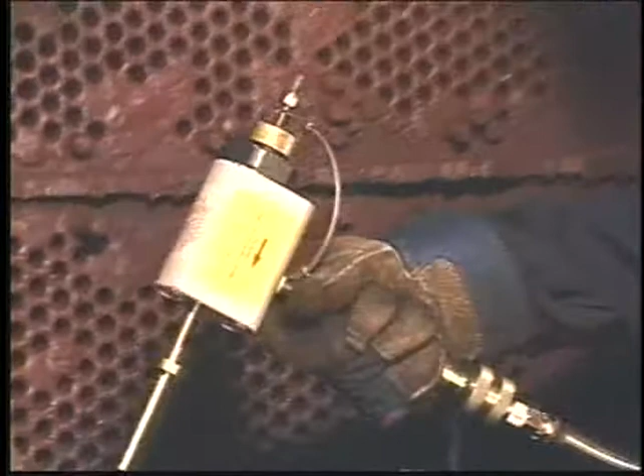Expansion Seal Technologies P2 Plug Installation Training. This training video shows how to select proper plug size, prepare heat exchanger tubes, and install Expansion Seal Technologies high-pressure P2 plug. See the CPI PermaPlug training video to install CPI PermaPlugs.

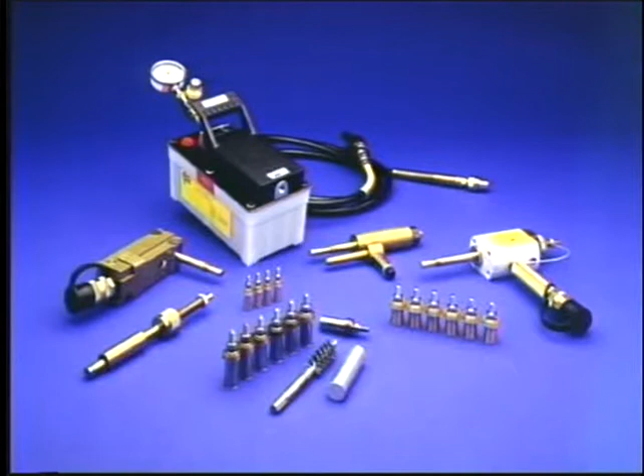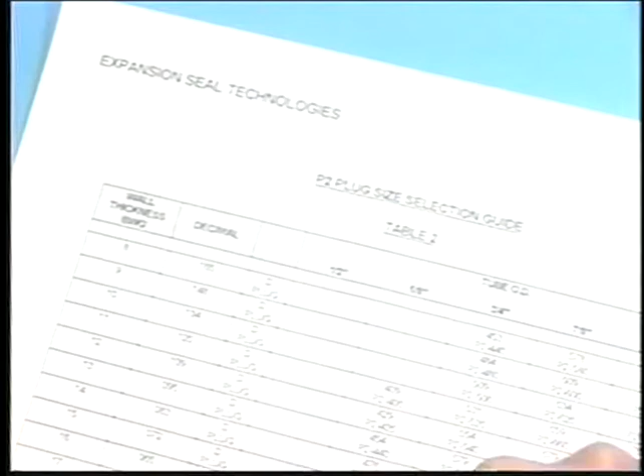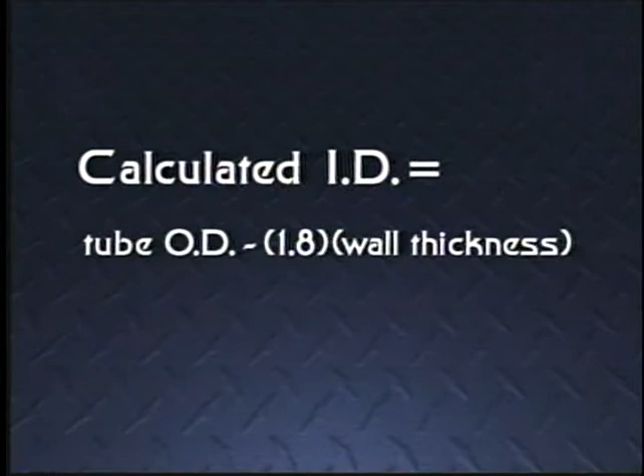If plugs are purchased before it is possible to measure the actual tube ID, the proper plug size can either be determined from information in the heat exchanger data sheet or from prior experience with that heat exchanger. From the data sheet, take the tube OD and wall thickness and determine P2 sizes using either EST's sizing guide or the tube ID calculated using the following formula. Calculated ID equals tube OD minus 1.8 times wall thickness. Both of these methods will provide a good starting point for the outlet tube ends.

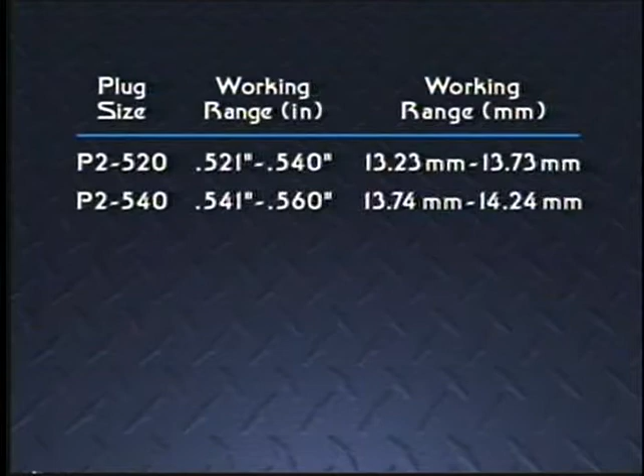Each P2 plug size is capable of expanding 20 thousandths of an inch, 0.5 millimeters. If the calculated tube ID is within 5 thousandths of an inch, or 0.13 millimeters of the top of the plug size range, order the next larger plug size to allow for required material removal during brushing. For example, if the calculated ID is 0.537 inches, select a 540 P2 plug size.

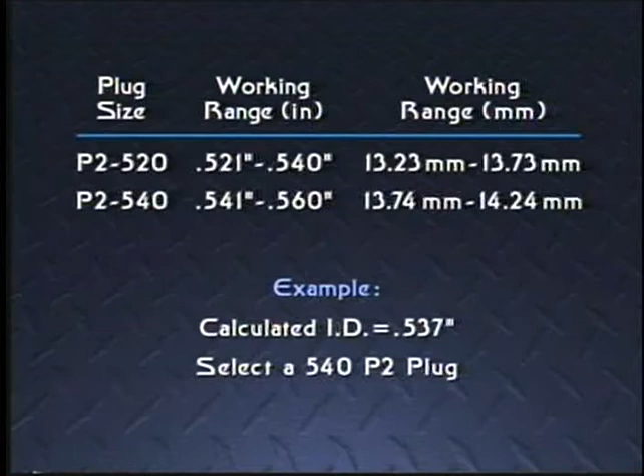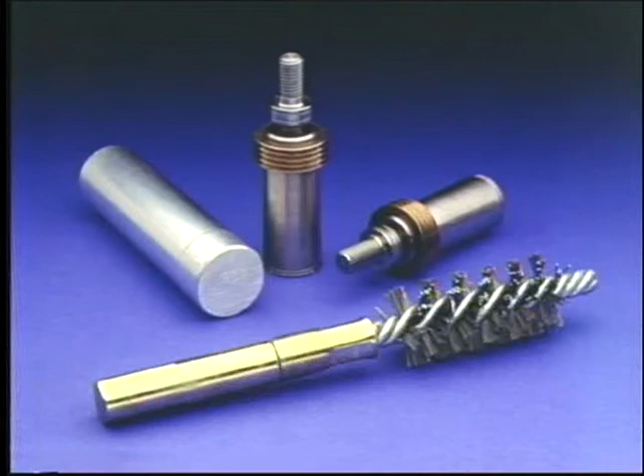The inlet tube diameter may be eroded as much as 3/32 of an inch or 2.38 millimeters due to wear caused by inlet fluid turbulence. It is always wise to have on hand plugs up to a few sizes larger than calculated, especially for an older heat exchanger. Obviously, if the heat exchanger is already open, it is best to measure the actual tube ID at the inlet and outlet.

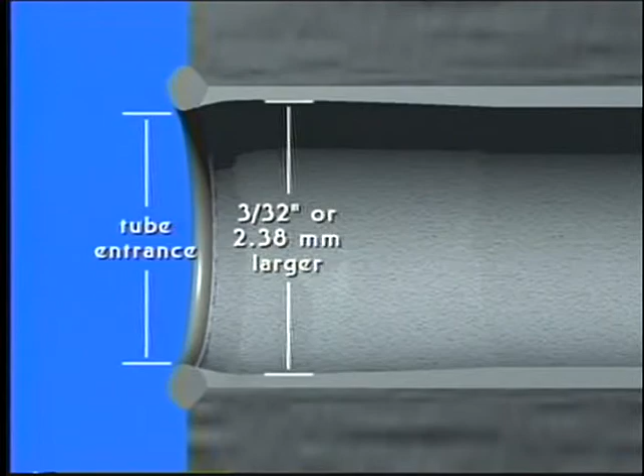Be careful to remove any weld projection with a tapered reamer before measuring. If this is not done, you will find that you have ordered undersized plugs. When selecting P2 plugs, the plug material must match the tube material. Always prepare a tube before plug installation.

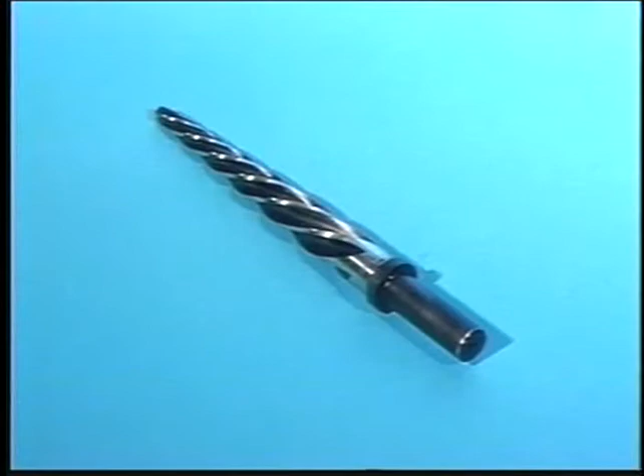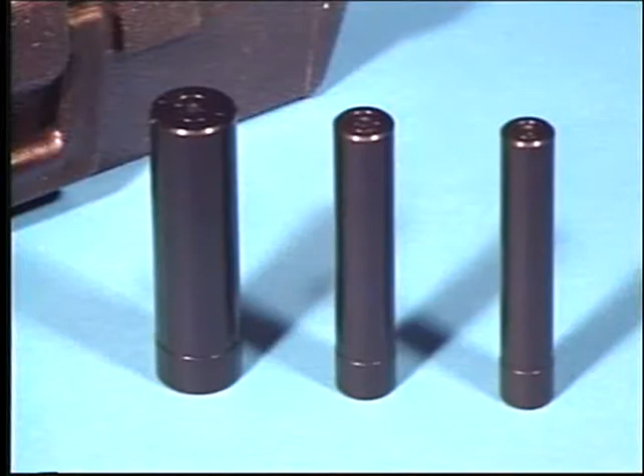The tube preparation tools are a tapered reamer to remove weld projection, a go, no-go gauge, and the proper size tube cleaning brush. A go, no-go gauge and tube cleaning brush corresponding to the plug size is supplied with each box of P2 plugs. Go, no-go gauges are also available in the form of a gauge kit. Gauge kits, additional brushes, and tapered reamers are ordered separately.

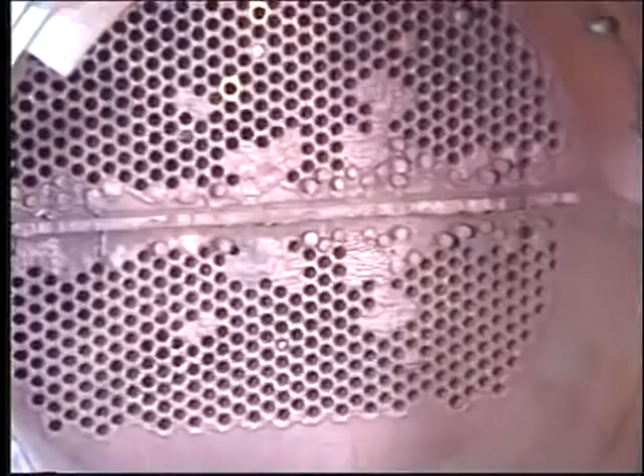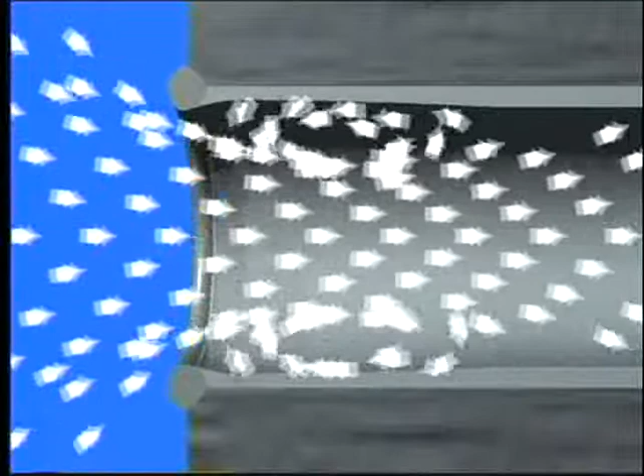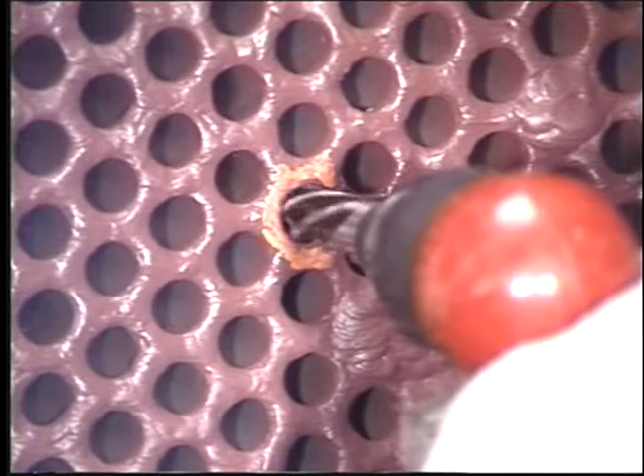Feed water heaters have rolled and welded tube-to-tube sheet joints. Fluid turbulence at the tube inlet erodes the tube wall more than the harder weld material. Over time, tube ID can be 3/32 inches or 2.38 millimeters larger than the weld entrance. The resulting weld projection must be removed using the tapered reamer because a plug that only fits past the weld projection will be too small to seal the tube, and the weld projection destroys the brush.

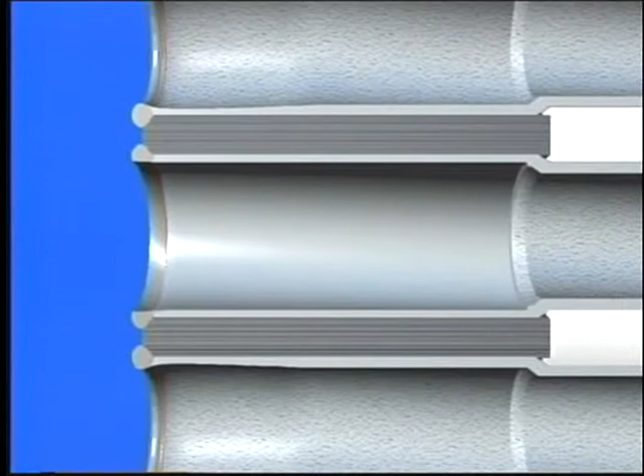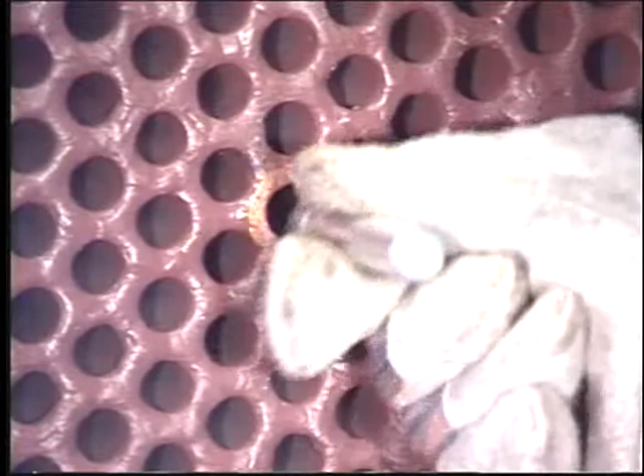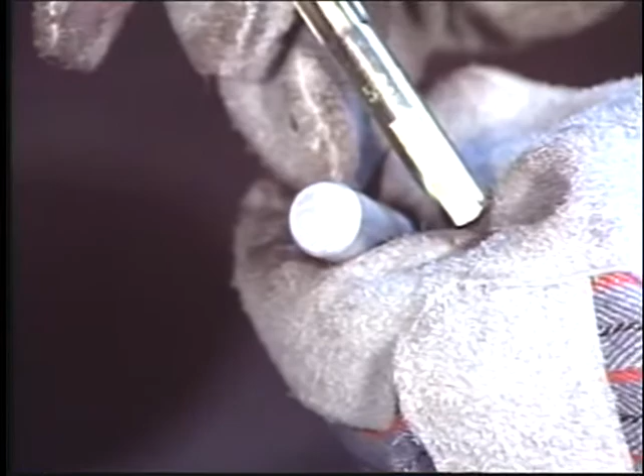When reaming, remove only enough weld material to clear the end of the tube. Do not over-ream. After tapered reaming, use the go, no-go gauge to confirm the correct brush size. If the small end fits into the hole but the large end does not, use the brush stamped with the same size. Do not assume each tube hole will be the same size. Gauge every tube end. The correct brush machines the tube to the brush OD. The use of Lubatube, a brush lubricant, greatly enhances the performance of the brushes in harder tube material.

Never use a smaller or larger brush than indicated by the gauge. A smaller brush will not remove tube defects. An oversized brush may jam and break. Reversing the drill to remove a brush will loosen the bristles. An oversized brush will create deep grooves and leaks.

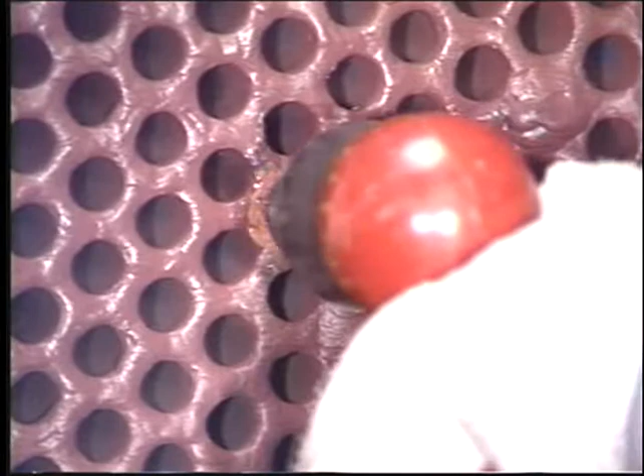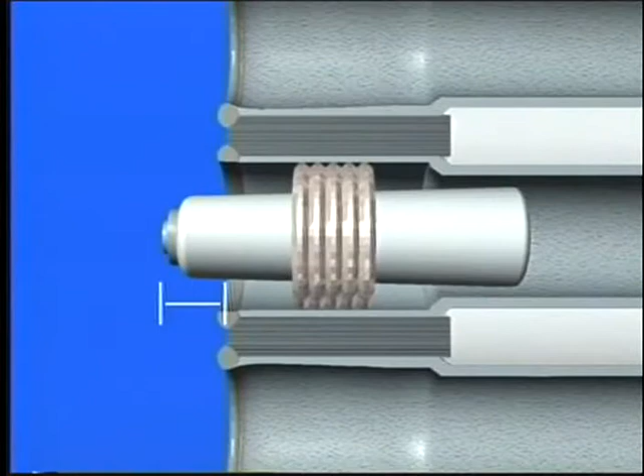Next, establish the correct installation depth. First, the plug must be installed in the rolled section of the tube sheet. Second, install the plug deep enough, 1 3/4 inches or 45 millimeters, to hide and protect the pin, but only if the tube sheet is at least 2 inches or 50.8 millimeters thick. If the tube sheet is less than 2 inches thick, the plug will have to be installed at a shallower depth and the pin may project beyond the tube sheet face. Be careful never to strike the exposed pin.

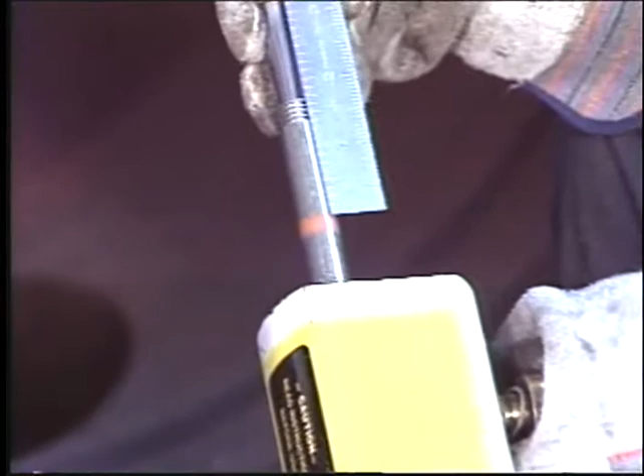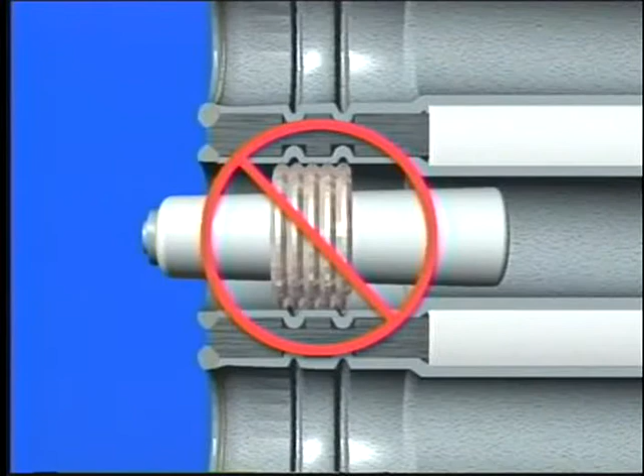For convenience, a reference mark may be made on plug positioner as shown. Marks should be removed at the completion of the job to prevent confusion the next time they are used. Caution: never install a P2 beyond the tube sheet, in the unrolled portion of the tube within the tube sheet, or over the grooves in a grooved tube sheet. Leaks will occur after thermal cycles.

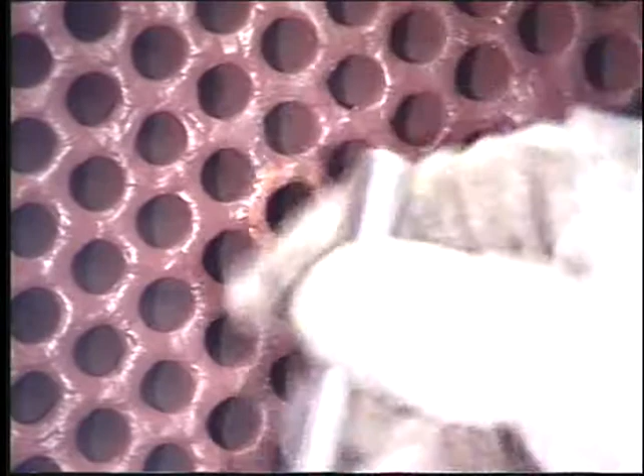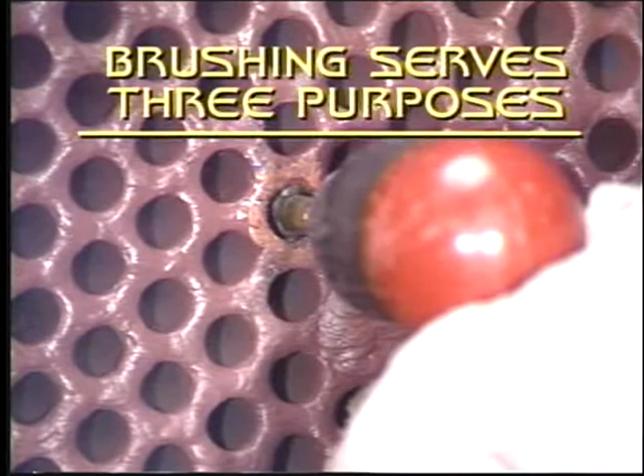Using the go, no-go gauge, determine the brush size, then brush the tube end for 30 seconds using a slow, steady back and forth motion evenly along the length from the opening to the installation depth. Brushing serves three purposes. The brush sizes the hole and makes it round. It removes leak-causing surface defects. Brushing improves the grip between the plug and the tube. Always inspect to see that brushing has accomplished these objectives.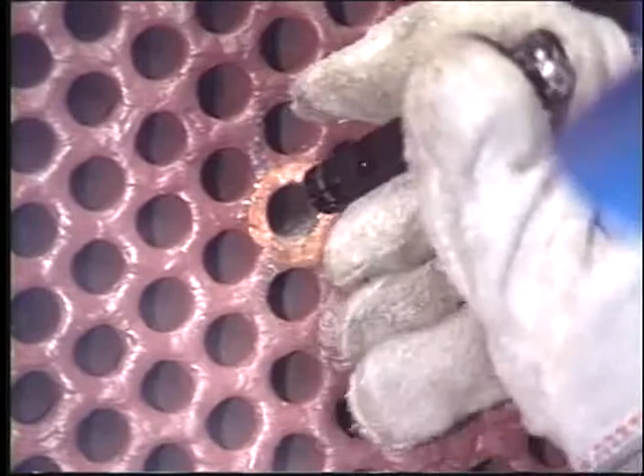Next, after blowing away the particles left from brushing, visually inspect the hole to see if it is defect-free. If there are still visible defects, repeat the brushing with the next larger size brush. Severe defects may require brushing with successively larger brushes to remove them. When moving up to a larger brush, never force the brush into the tube end. Allow the brush to do the work.

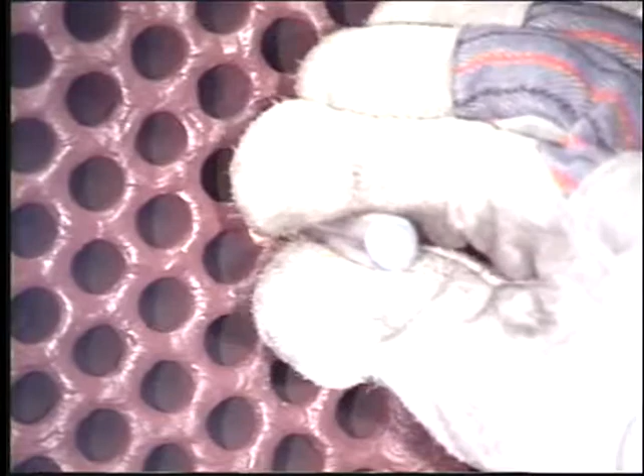Second, recheck the size of the brushed tube with the gauge. If the small end fits to the installation depth but the large end does not, install a P2 plug of the same size as the gauge. The tube preparation is complete.

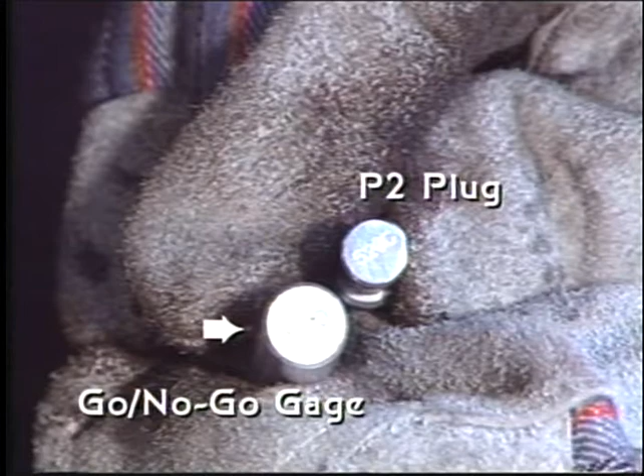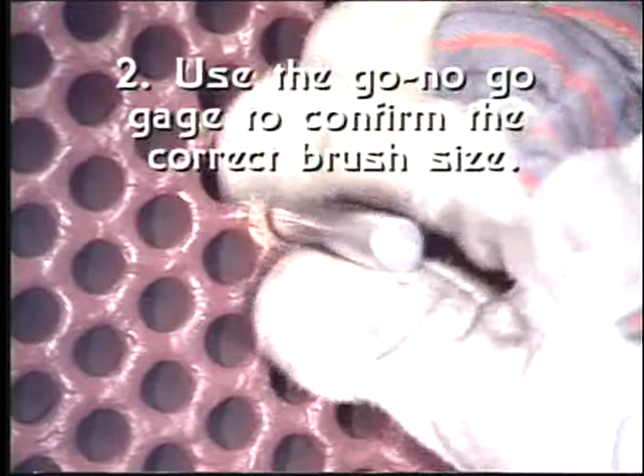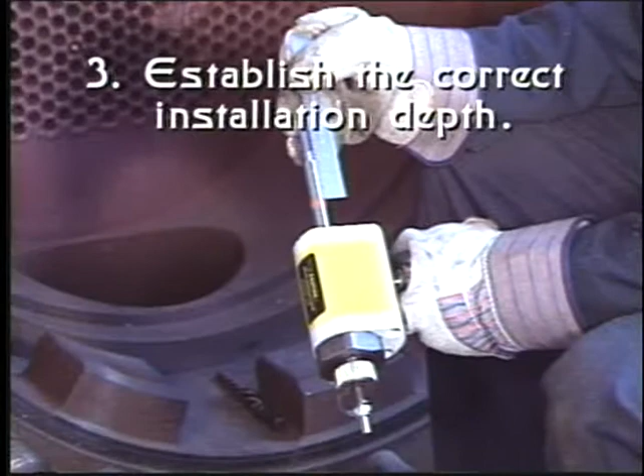The steps taken were: Number 1. Remove weld droop with tapered reamer. Number 2. Use the go, no-go gauge to confirm the correct brush size. Number 3. Establish the correct installation depth, preferably at least 1 3/4 inches or 45 millimeters unless the tube sheet is thinner. Number 4. Brush to the installed depth using even back and forth motion for 30 seconds.

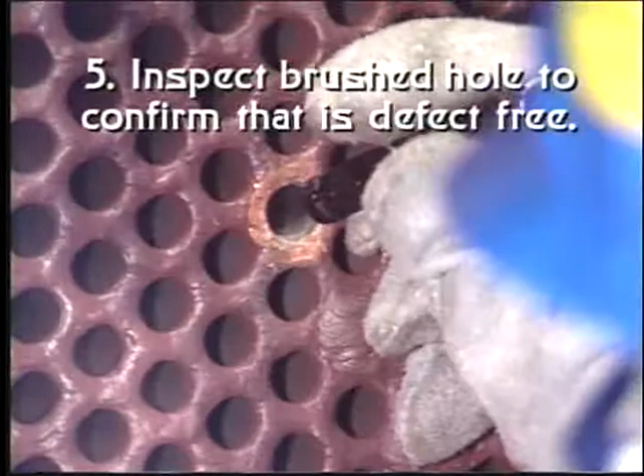Number 5. Inspect brushed hole to confirm that it is defect-free. Number 6. Re-gauge the brushed tube to confirm the correct plug size. We are now ready to install the plug.

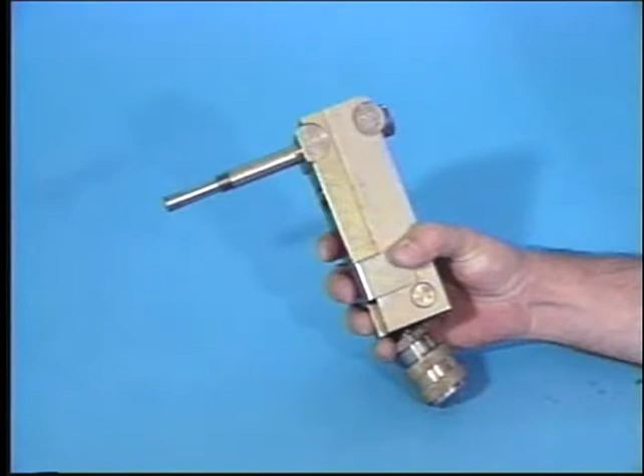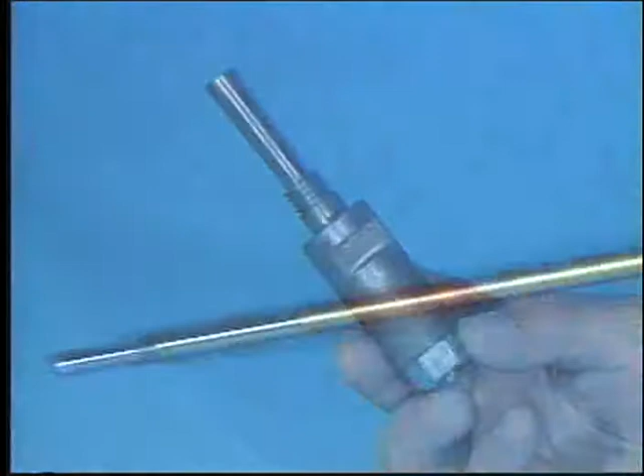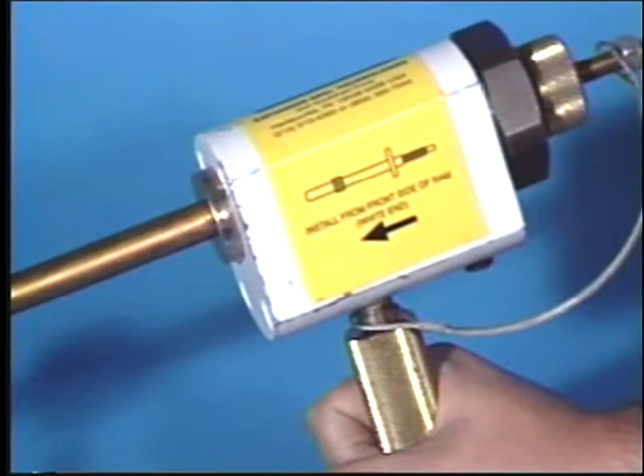The plug may be installed with the small or large hydraulic ram, close quarters ram for plugs near the perimeter of a Hemi head heat exchanger, manual installation tool, or OPT tool for the most confining spaces. Channel head extensions are needed for narrow channel heads or when the dividing plate or wall is within 1 1/8 inch of the center line of the leaking tube. These extensions may also be used to operate the brushes.

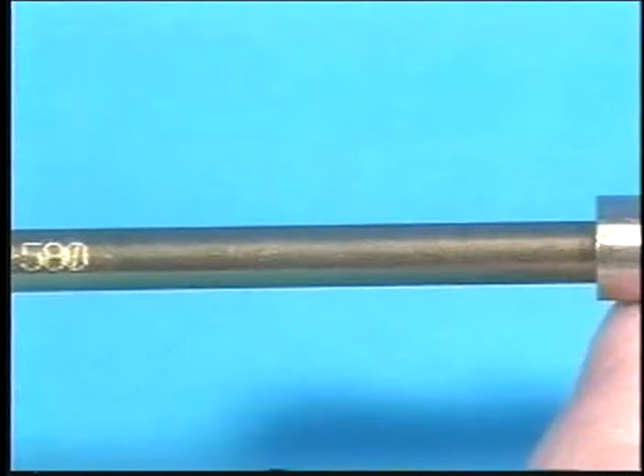Each component of the pull rod assembly is stamped with an arrow and the plug sizes for which it may be used. Always make sure that the arrows are aligned so that they point to the plug, and be sure the pull rod and plug positioner are correct for the plug size being installed.

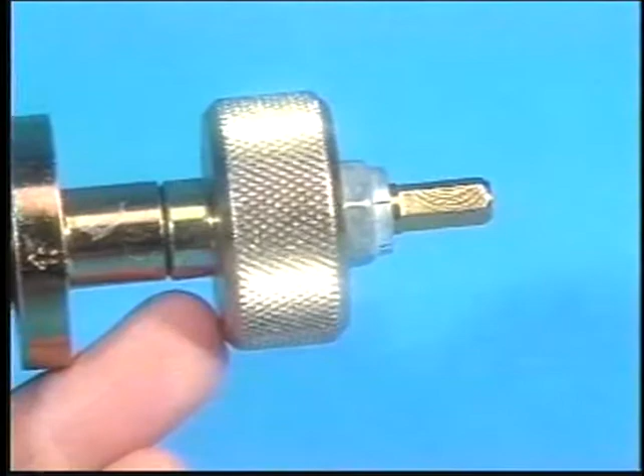Thread the P2 plug into the end of the pull rod assembly with a plug positioner arrow pointing to the plug. Remove the knurled nut and insert that end through the front of the ram. Secure the pull rod assembly with the knurled nut and install the safety cable with the lock nut.

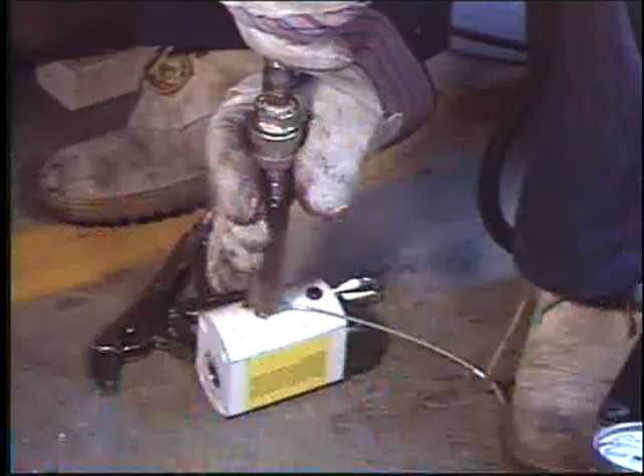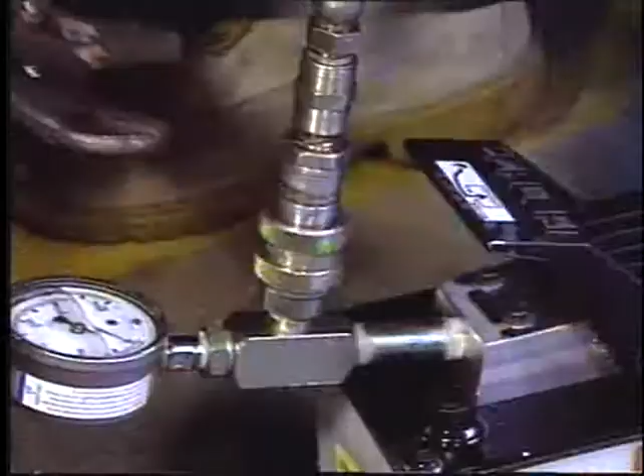The hose must be tightened at both ends securely with gripping pliers. If this is not done, the pressure will lock up in the ram. The pressure can lock up either at the ram handle or where the hose is connected to the pump, depending upon which connection was not securely tightened. If this occurs, firmly retighten both ends with gripping pliers to release any trapped pressure before proceeding.

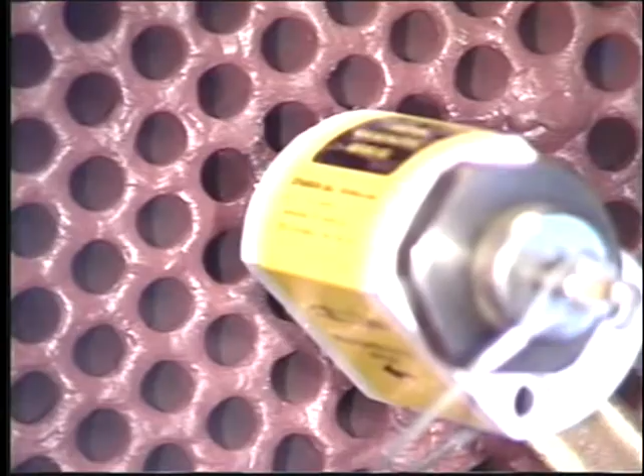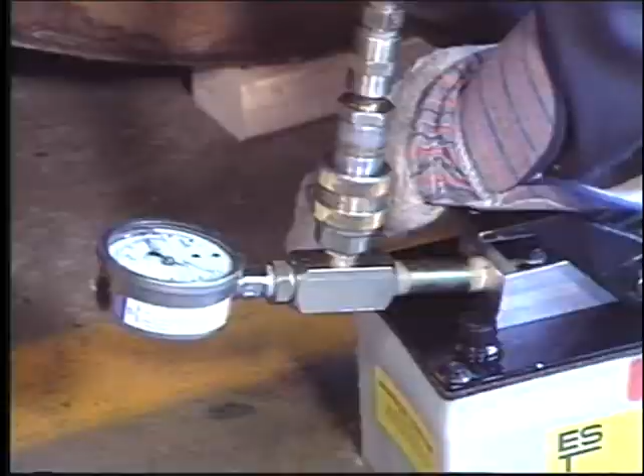Position the P2 plug in the tube at the desired installation depth. Support the ram and depress the hydraulic pump pedal to operate the ram until the breakaway pops. If the breakaway has not popped by the end of the ram stroke, release the pressure in the ram by depressing the other end of the hydraulic pump pedal. Then retighten the knurled nut and operate the pump until the breakaway pops.

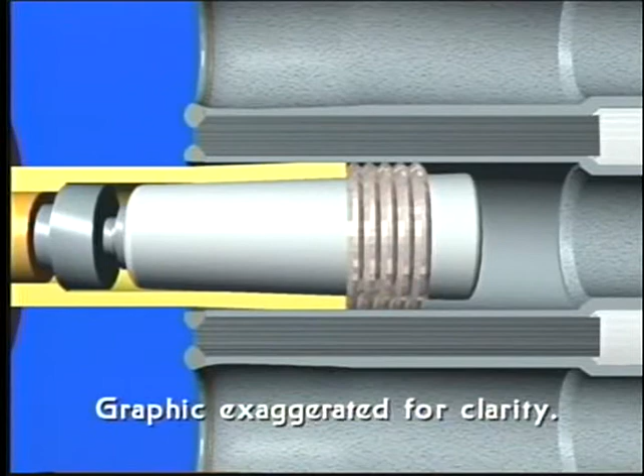If the pin pulls through the ring, the plug positioner becomes stuck on the pin or the breakaway breaks on the wrong side, then the plug that has been installed is either too small for the tube, has been installed in the unexpanded portion of the tube, or has been installed beyond the tube sheet. Remove the plug positioner.

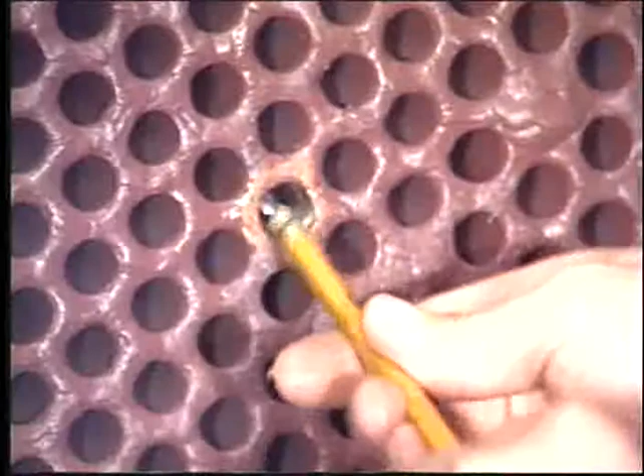Remove the breakaway stub end, then remove the plug with a removal tool and correct the problem by brushing up and installing the next larger plug size. This must be done even if the plug passes a leak test. Failure to replace a plug that is too small will most certainly result in leaks after a short operating period, if not right away.

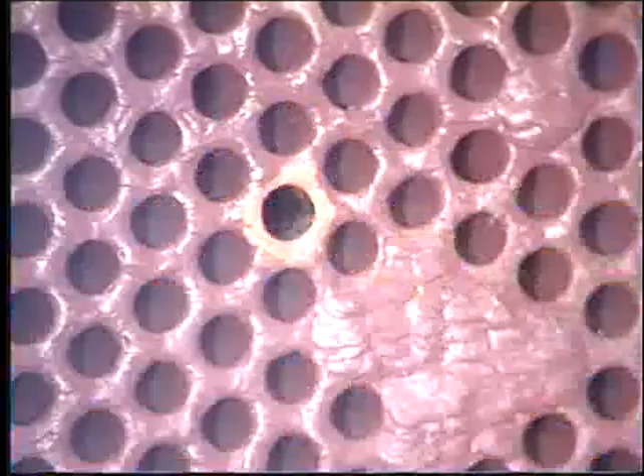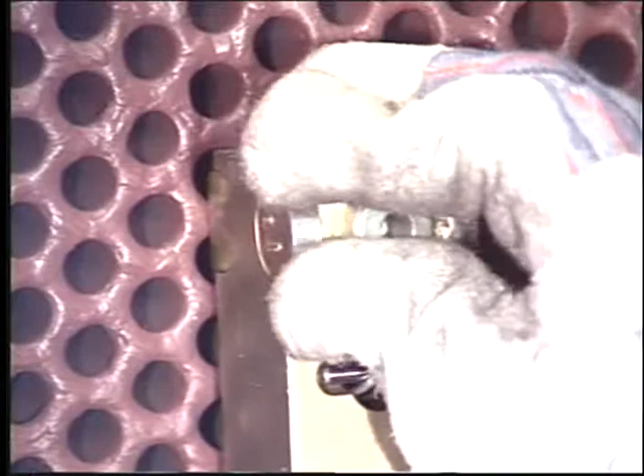When using the close quarters ram because of the limited headspace, follow the instructions for assembling the CQR pull rod assembly parts to the plug and insert them into the tube. Place the CQR over the tube and fasten the nut. When operating the pump, be sure to support the CQR by holding the hose connection so that the hose connection and ram are free to pivot away from the tube sheet surface. This will ensure a proper installation of the plug.

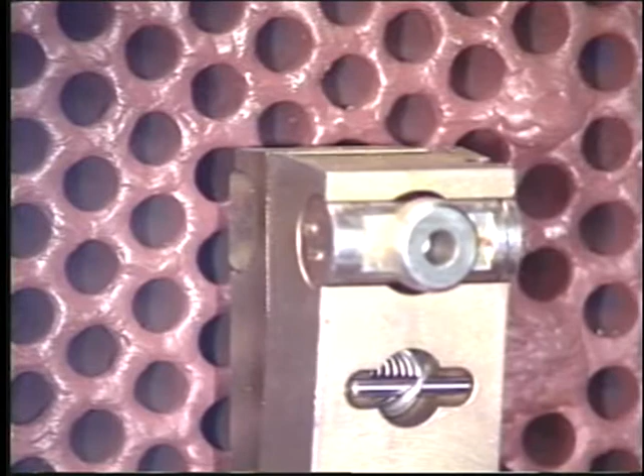When using the close quarters ram, the plug should always pop on the first stroke. If not, the plug is most likely undersized and should be removed. Correct the problem by brushing up and installing the next plug size.

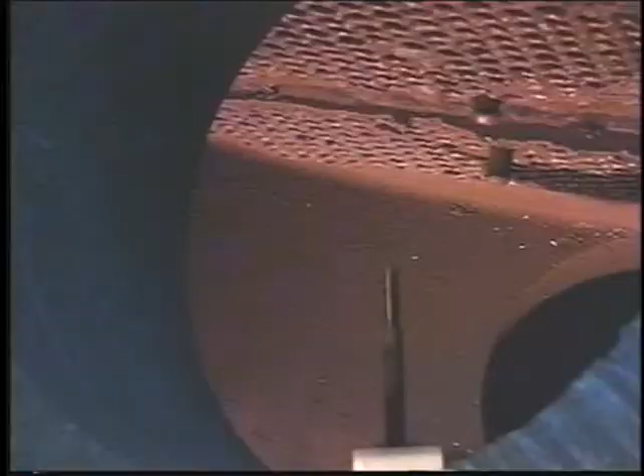The only reasons for a plug leak are tube defects remaining after brushing that were not seen during inspection, or the plug was undersized, installed in an unexpanded portion of the tube, or has been installed beyond the tube sheet. Leaking plugs must be removed and the installation procedure repeated. Correct the problem by brushing up and installing the next larger plug size in the rolled portion of the tube end. When the steps outlined in this video are completed properly, installation of P2 plugs is fast and easy.